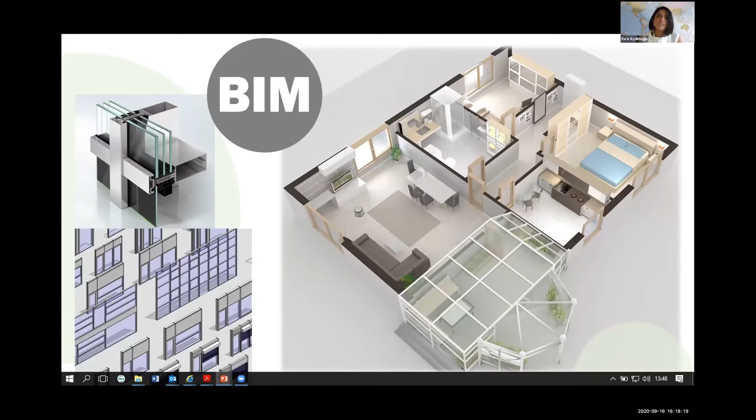You will soon find all our products as smart objects and materials in BIM libraries. In Sisecam Flat Glass, we have solutions for all needs of the projects and unlimited creativity of architects. So please do not hesitate to ask any question to us either in Q&A or through our email account.

Thank you. Thank you, Esra. This was wonderful as always. There's so much information and really relevant.

We have an important announcement to make. May I pass it on to Matali to do the honors?

Thank you, Indrajit. Thank you, Esra, for that really wonderful presentation. It's really set the tone for what's to follow. We're looking forward to a very interesting discussion.

But before that, I just want to take a minute to introduce you to something we're doing at Architect Interiors this year. This is a very exciting new project that we've announced just a short while ago, and I thought this is the perfect opportunity to talk about it. So as most of you are aware, for the past 9 years we've been having the iGen, and it's got a fabulous response. Every year we get to introduce 50 emerging, up-and-coming, budding architects and interior designers. And this year we're taking it one notch further. We want to bring the people in. We don't want to be the only ones to have a say. So we're introducing a People's Choice Award for the iGens we've chosen this year.

And to tell you a little more about it, we've got a short video that we'd like to play. We want to invite votes and get as much audience participation as we can. So Rohan, if we can have the video, please.

So we design and build things like intelligent totem poles that we can plant around the city. Here are two examples we've done in Hong Kong, which monitor the environment, count the traffic, count the people flow, and see the patterns of use of the space around. This data is then shared with the regional architecture, the neighboring buildings around, so they can really respond to the needs of the people out in the public space.

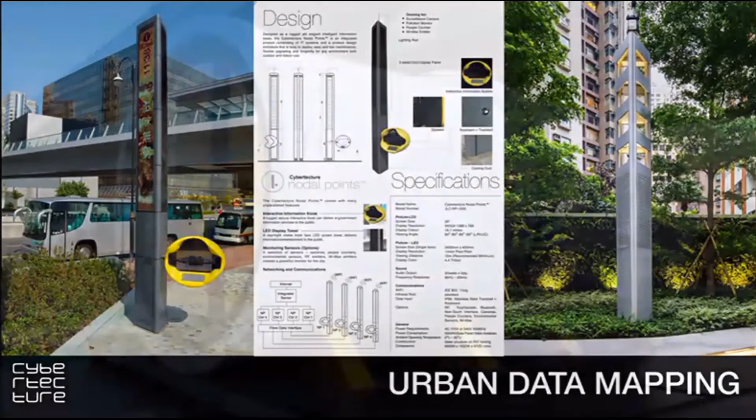We really think that parametric architecture isn't just about form making. It's not just about creating interesting, intelligent forms, though that's part of it. There's a parametric life behind the architecture that affects the people living inside it in a way that is much more intelligent and more empowering than in the 20th century. This is, I think, the really exciting part about parametric architecture for us.

James, very interesting, I think you really brought technology and lives of people together. What gave you this idea? I remember the one you mentioned about the glass talking and giving you information, this was done many years back in your work. What propelled you to go in this direction?

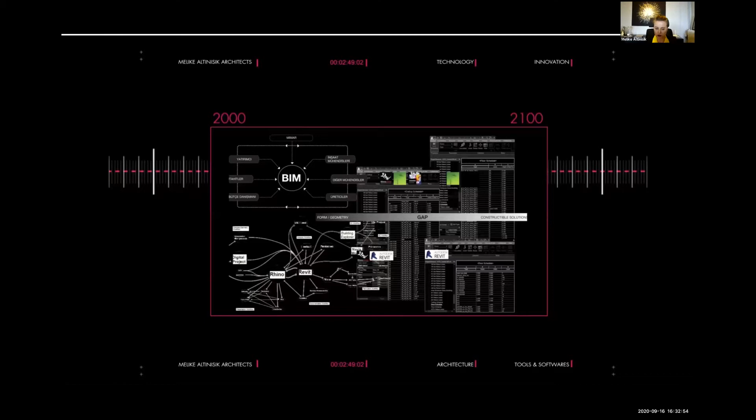Advanced technology implementations define today the way we think and design, in the last decades especially. We need to live in smart cities, and designing smart cities requires smart design and smart construction methodologies. Most of the time, we take already existing computational design and fabrication techniques from other industries, such as aircraft design or the car industry. By reusing those technologies, we apply those systems into architecture in our studios. CNC, laser cutting, 3D printing, robotic fabrication are just some examples of those tools which we use in our daily work.

Once you discover these unseen logics behind these systems, you can start working on multidisciplinary platforms. Each project has its own challenging problems, and they require unique smart solutions. In my studio, related to this subject, our design approach also aims to apply those computational design systems into architecture, and we work on varying scales of projects.

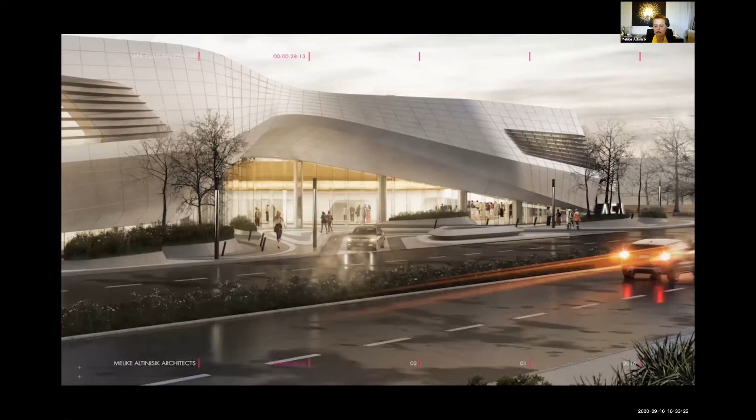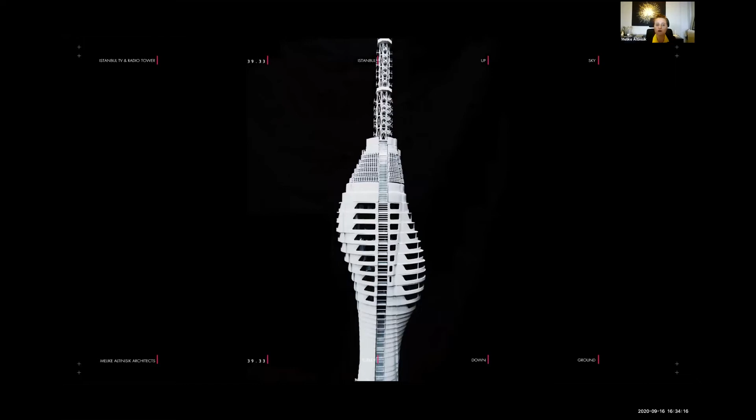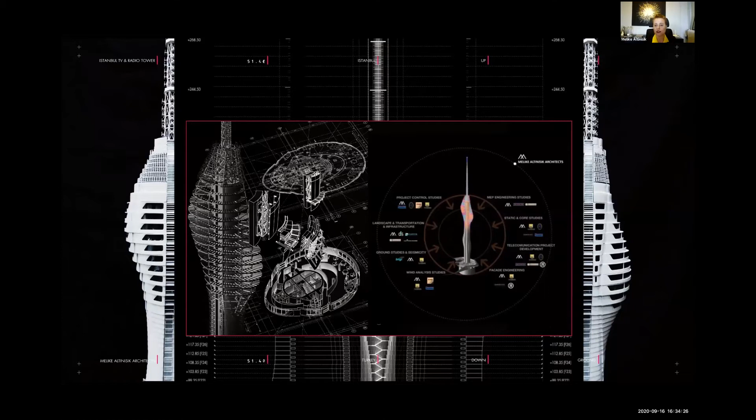The first one is the Istanbul TV and Radio Tower project, located on the Asian side of Istanbul. It is a 369-meter tall TV and radio tower project - a telecommunication tower, but it has public functions also inside. To shape this building, we used all the wind data located around this area, and we gave the shape of the tower using all this data. That's why the facade looking towards the Asian side of Istanbul is different than the facade looking towards the European side of Istanbul. All these parametric tools actually enabled us to create a really important dialogue between parametric design and smart construction on site.

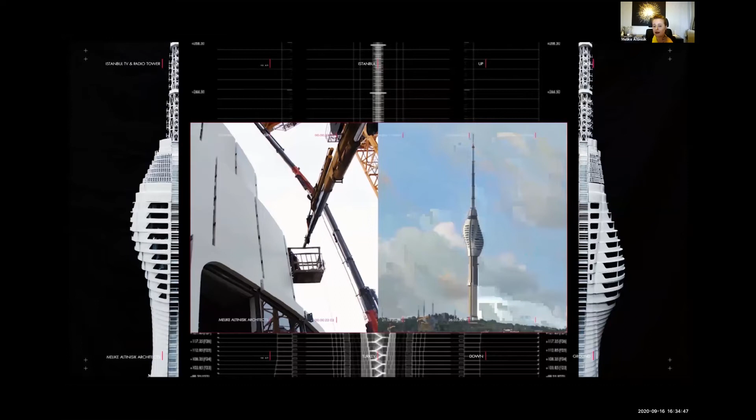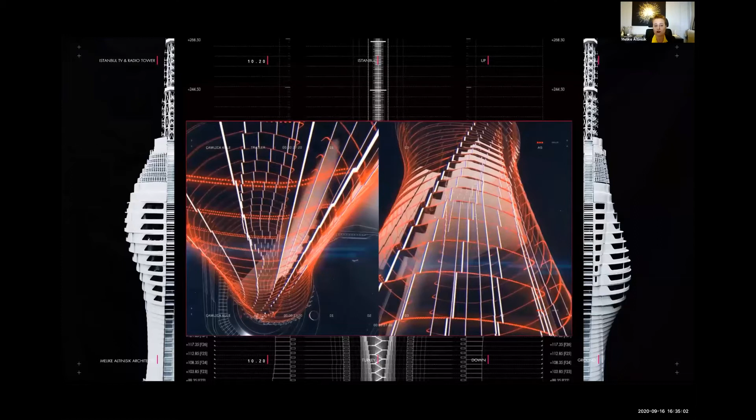We used totally advanced engineering techniques, building up the building from a bottom-up approach. We built 4 or 5 level high blocks on the ground and lifted them up 200 meters above, around the core of the building. There are more than 2,500 different facade panels, each curved, using glass reinforced concrete, and this already required a specific kind of digital fabrication, and mock-up making was also very important for this tower.

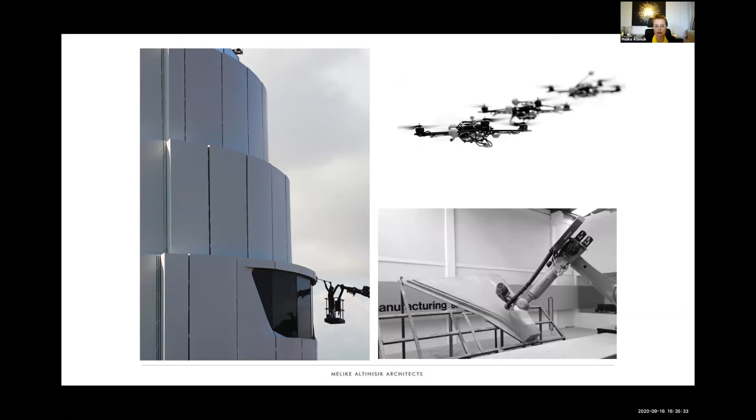We hope to use drones for facade maintenance in the near future for this tower. Since we have been using all these parametric tools, they will also give us this advantage for maintenance after the opening of the tower. Very soon, hopefully next month, the public will be able to come and watch the panorama of Istanbul, almost 400 meters above sea level. We hope to see you also here in Istanbul after these COVID-19 days.

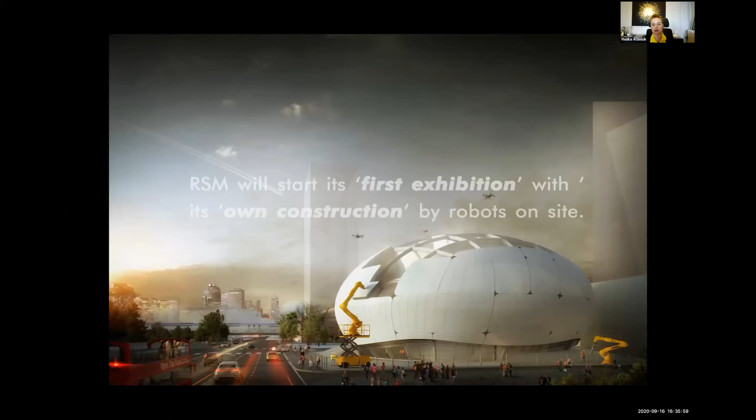The next project I would like to shortly mention is this Robot Science Museum project, located in South Korea. For such a smart city, we wanted to really propose a smart design and construction methodology.

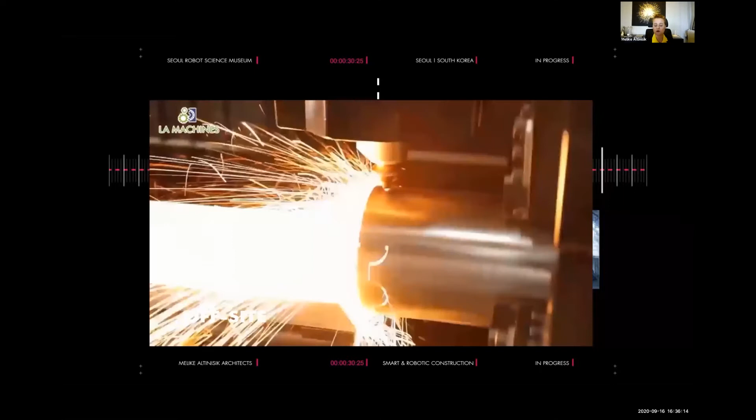So this building will also start its first exhibition with its own construction. And here one of the most important subjects is this: currently, in our era, we are using all these computational design tools. They are communicating with offsite manufacturing.

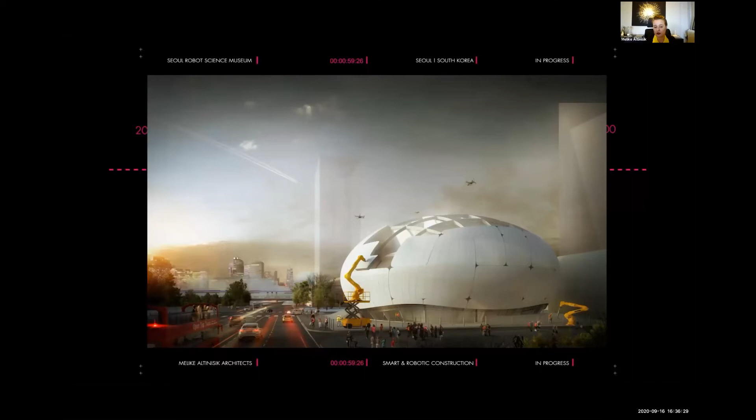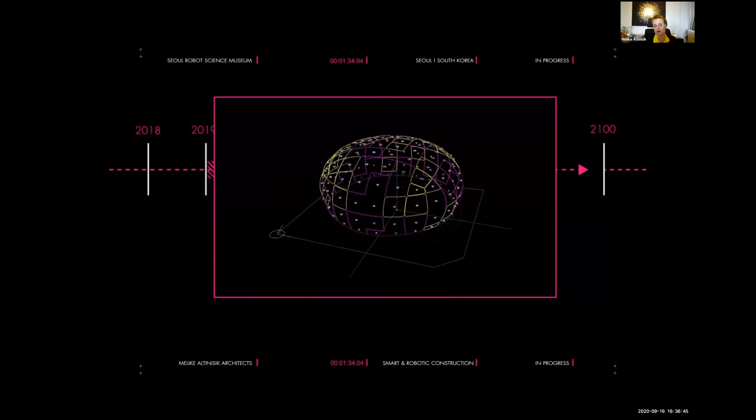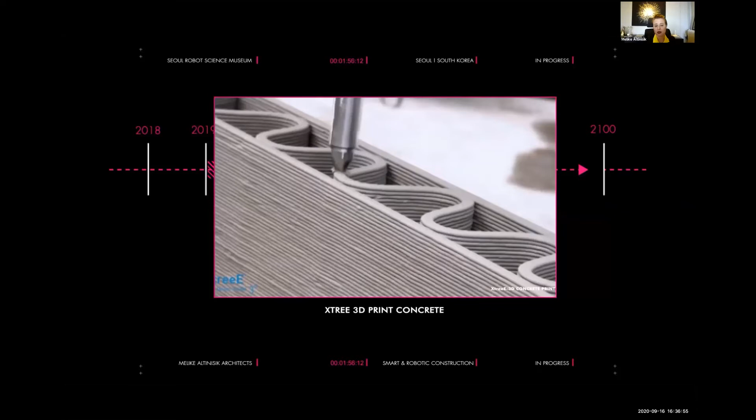But the most important subject for the near future will be doing this on-site. And to be able to do this, we have to really create very smart design tools to control every single element during the design process, to communicate on site with the building builders, and these builders will sometimes be robotic construction methodology, sometimes again like human beings.

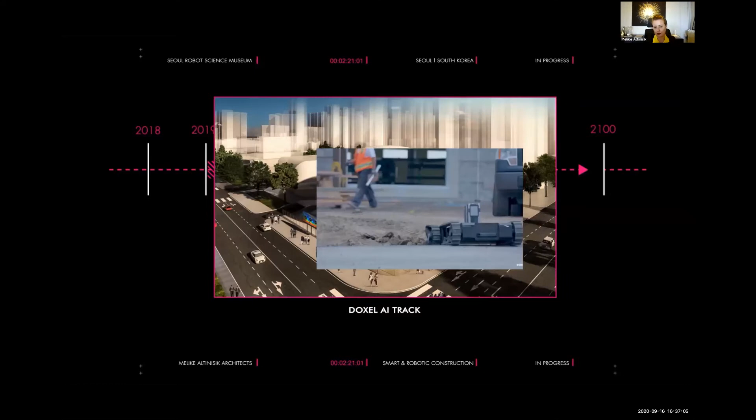And here we will be able to use all these types of very smart construction methodologies for this project on site. For all these things, parametric architecture is a key tool, but above it, I believe it's all related to building information modeling. All these things are united together through technology, and this type of museum will become kind of a monitoring and research center.

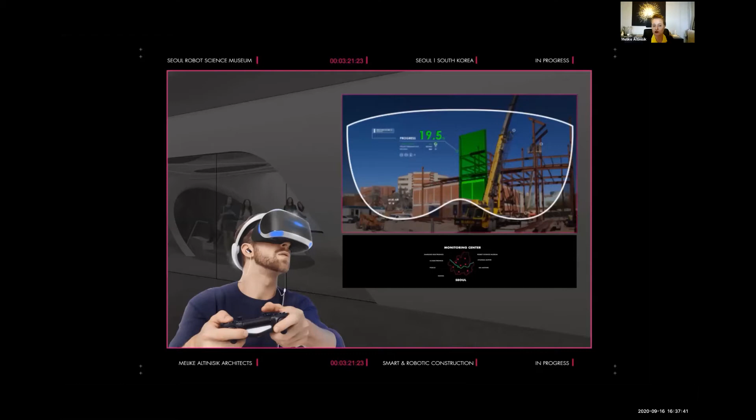And again, as James was saying, this is not only during the design and architecture part - also the living part, the social life inside these buildings, will be able to all connect to each other through social commons. And also there will be, in service, all these robotic services active for this project.

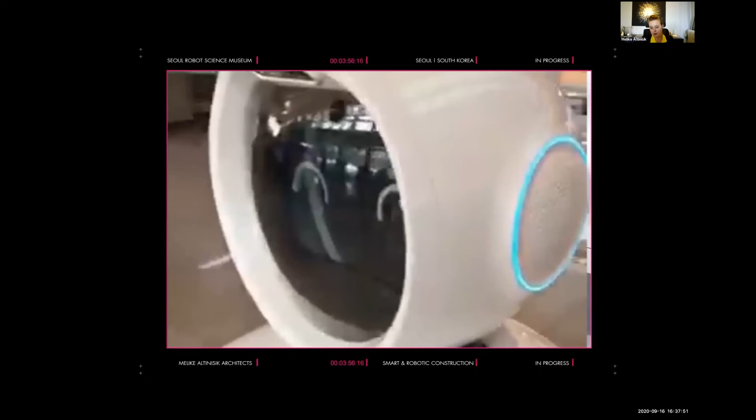So in general, I have to also say that soon, in the near future, all these developments between architecture and technology will enable us to become system builders for architecture. So not only are the tools getting smarter, we are getting smarter and we get connected together.

Thank you very much. Wonderful, wonderful, Melike. My goodness, compliments to you. What, wonderful, magnificent, large - I mean, I will run out of words. Am I audible? Can everybody hear me? Awesome. Now, Melike, that was tremendous. I mean, needless to say, for a moment I felt speechless looking at your projects and the kind of magnitude and thinking that would have gone into these.

Let me bring Sushant very quickly and hear from our friends from India as to what is the leap that we have taken forward in parametric architecture. But let me tell you, Sushant has been really imparting great education, not only in India, but world over. Over to you, Sushant.

Yeah, so I'll just try to go through various kinds of projects that we are doing. For me, computational design is a term which I more commonly use than parametric design. Parametric is a more popular word, more commonly used and understood by a lot of people. But in essence, it's actually computational design, where we are using computation and computing a lot of information and data - data being a word we heard in the previous presentations as well, because most of us are actually doing nothing but manipulating data to create better spaces and solve much more complex problems.

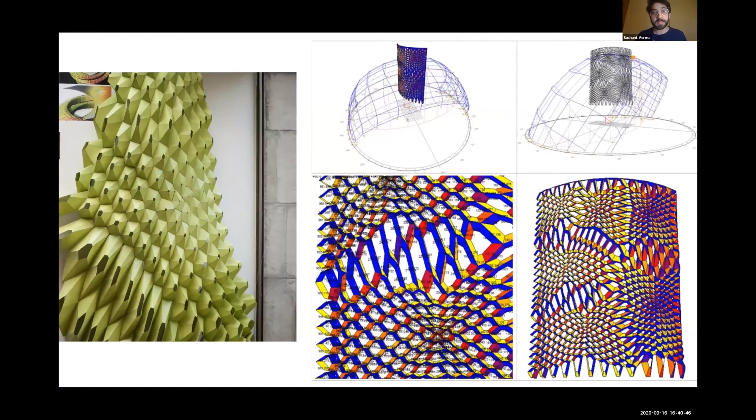These are a few glimpses of some installations. What I also want to throw some light on is the technical aspect which goes behind these forms, because as James also rightly pointed out, it is not only about the form or the geometries - that's obviously one major part of it, but more than that, there's a lot of data and information that we are working with. This, for example, is a prototype of a facade, and on the right-hand side, what you see is the radiation analysis of that facade with specific numbers and data information embedded into the model.

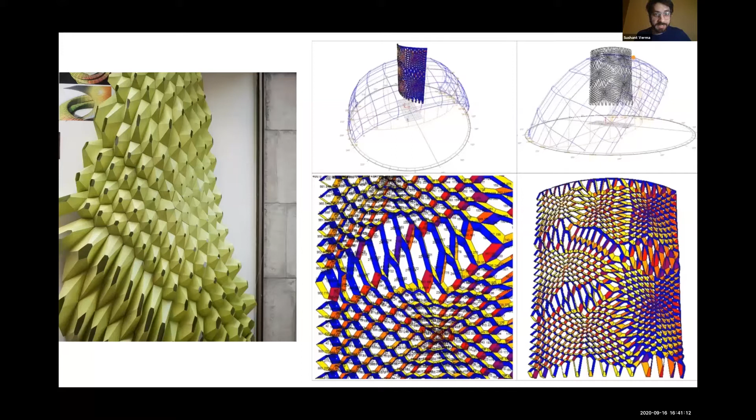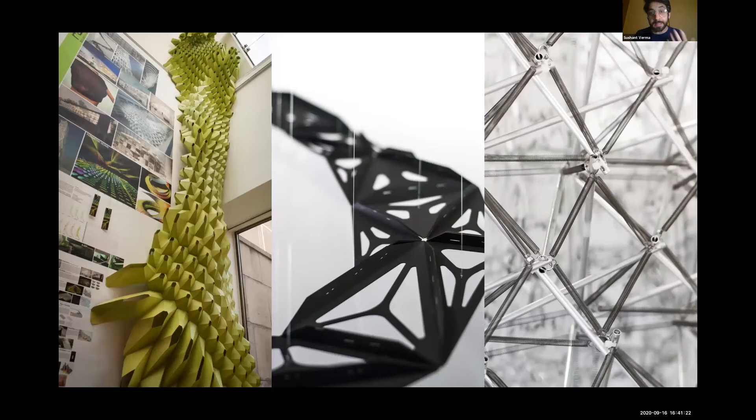Over here you would see the structural studies, the CFD analysis, which we typically carry out for some of the installations and projects. Going slightly on a larger scale, this is an interior space, an experience center, where the lights that you see over here is actually CNC cut marble, white marble, which we typically use for flooring. So of course, we try to bring in innovation in various aspects.

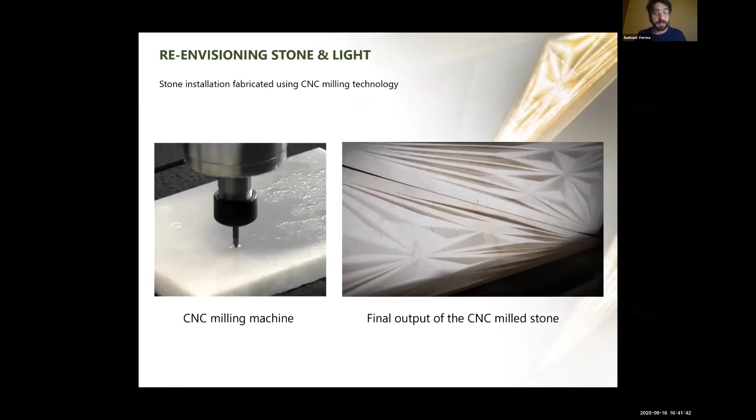In this particular aspect, the program was seeking innovation in terms of materiality and lighting, which we made possible using computational design. And of course, we used the recursive approach to design the mathematical fractals, which form the entire shell of this inner skin. The same thing goes on to a variety of projects and typologies as well.

These are a few restaurants which we've done. This is a lighting installation, a project we worked on with a lighting designer. This was a collaboration with a fashion designer. I'm trying to show you a variety of scales and typologies which allows us to work within the realm of computational design. These are office spaces and experience centers built across different cities in India, which have certain features of parametric design.

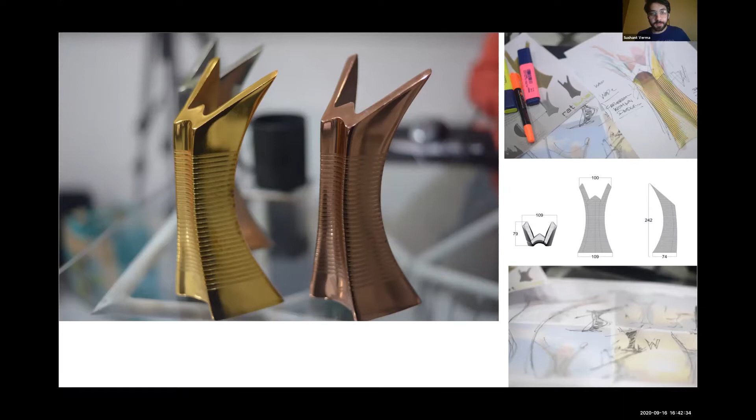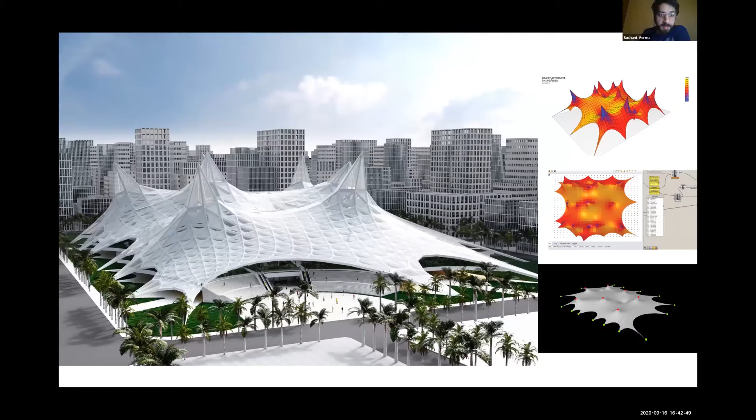At a smaller scale, at a product scale, we've also designed trophies and awards, which also have a parametric approach to it. This is a shopping center in Tokyo, a collaboration with Japanese architects, which was more of a form finding approach where we used a physics engine and simulated environmental aspects to optimize a skin, like a large scale complex or a small scale city, I would say.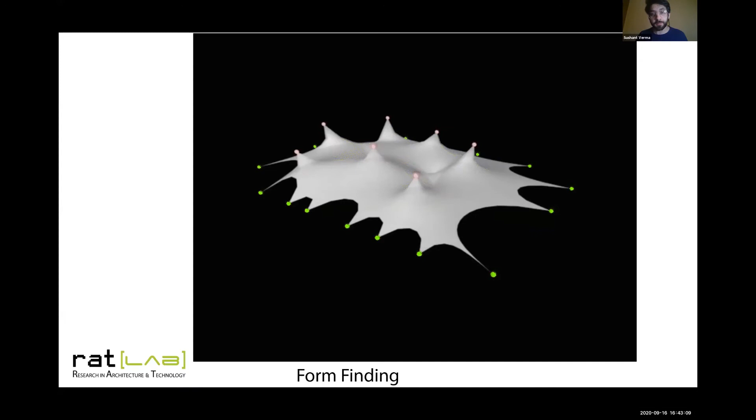Just a little video to show the kind of simulation that was done, which is a fairly simple one. We typically teach that to our students, where you have to do form finding and see how the structure is resolved as well.

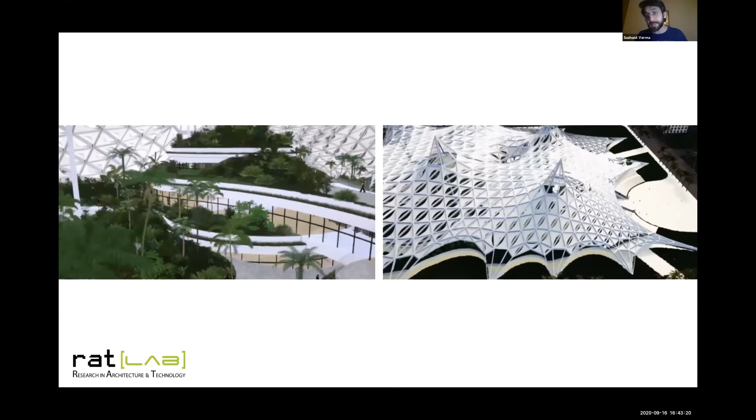These are some aerial views of the same, from the outside and the inside. All of these panels are actually adapting to the climatic aspect of Tokyo, which we analyzed to define the sizing of each and every element.

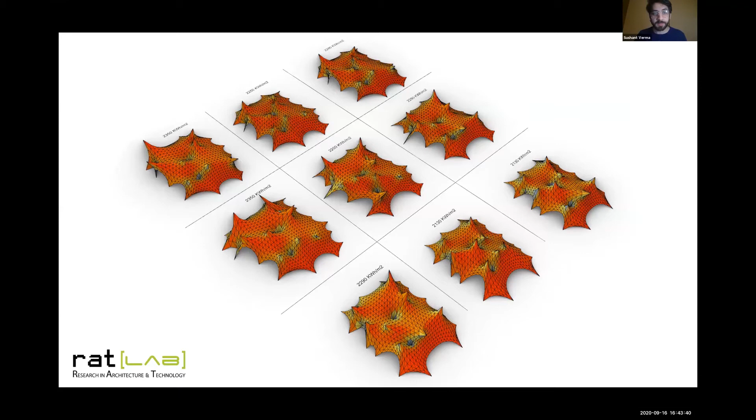Parametrically, of course, it allows you to create a multitude of geometries, but you need to be able to control the information and data. Here we're using the environmental aspect to rationalize the form, which you can see here. This is a facade project, which was more of a high tech and low tech approach.

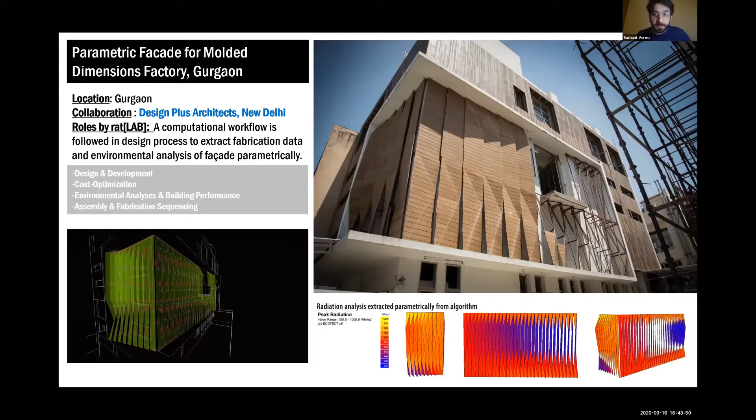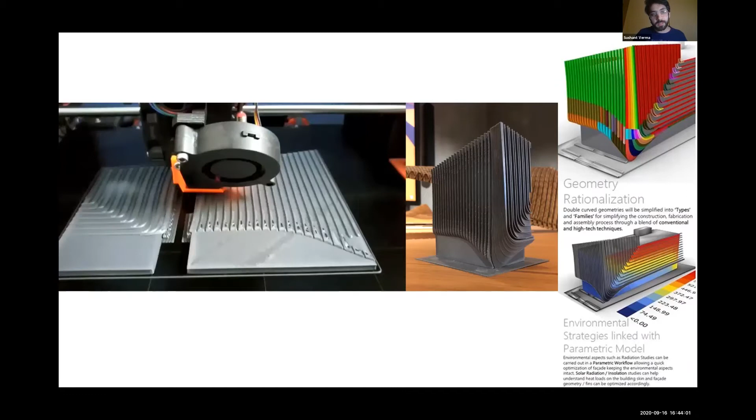This is another facade in Hyderabad, which we 3D printed at a small scale to make sure that a facade engineer in India who is not adept with high tech technologies is able to understand. So we have to simplify the complexity of any geometry and rationalize that based on any project.

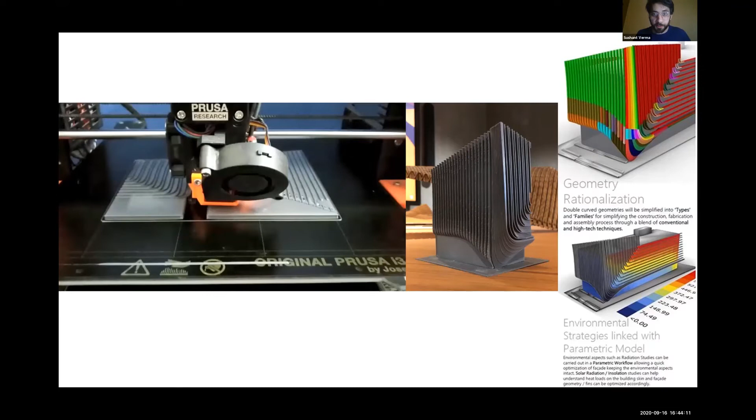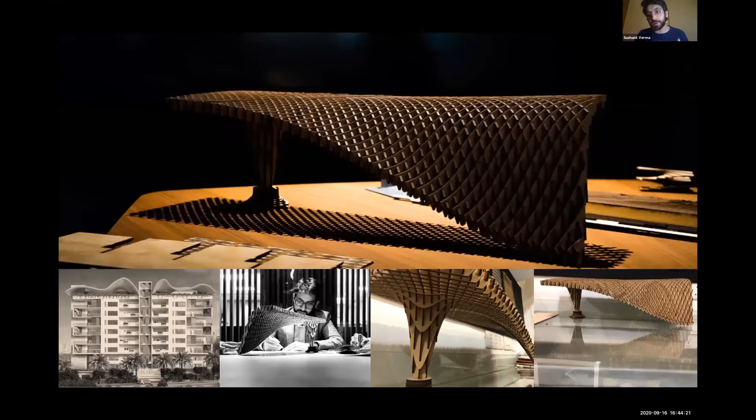These are a few more facade projects, ongoing ones, and a few canopy structures, which we again prototype at smaller scales to understand the fabrication. So it's a back and forth process. It's not that we are only working with computers to give us a form or a data or information.

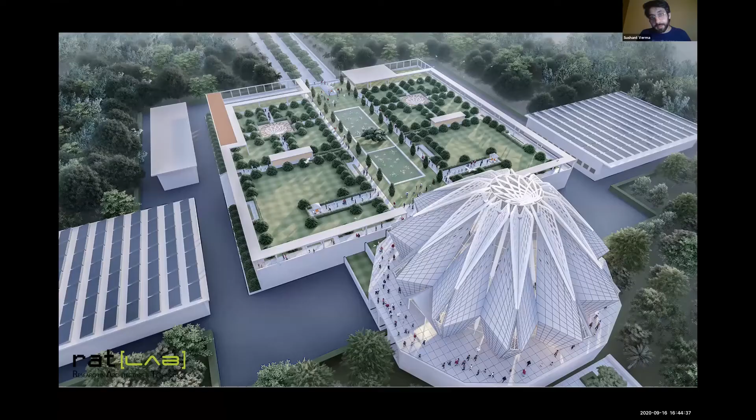This is one of the upcoming projects in South India. It's a temple project where we've used certain principles of Vastu and numerology to incorporate sacred geometries and forms, where we used an 11-sided hendecagon and created a variety of forms.

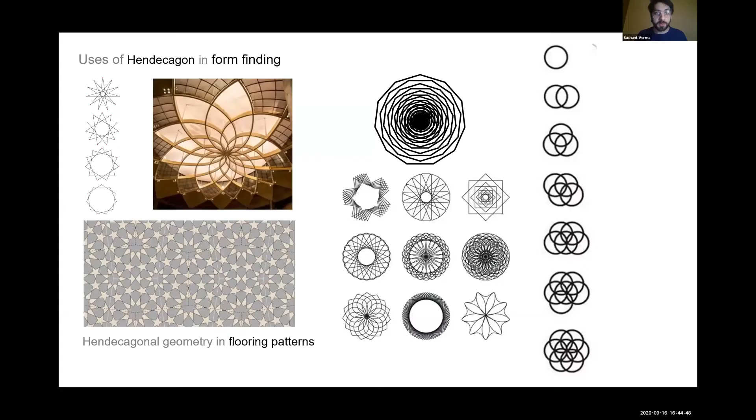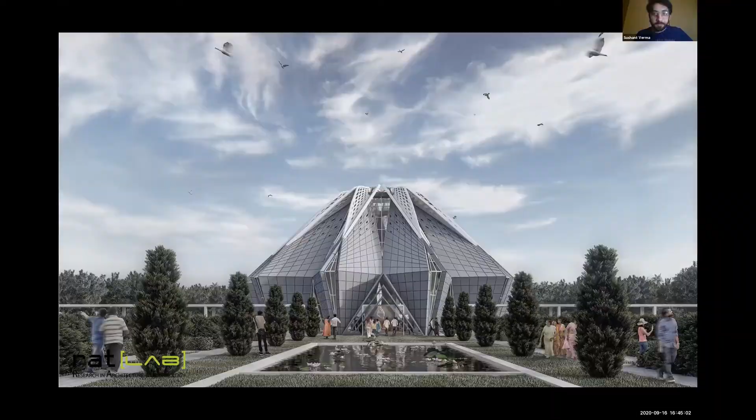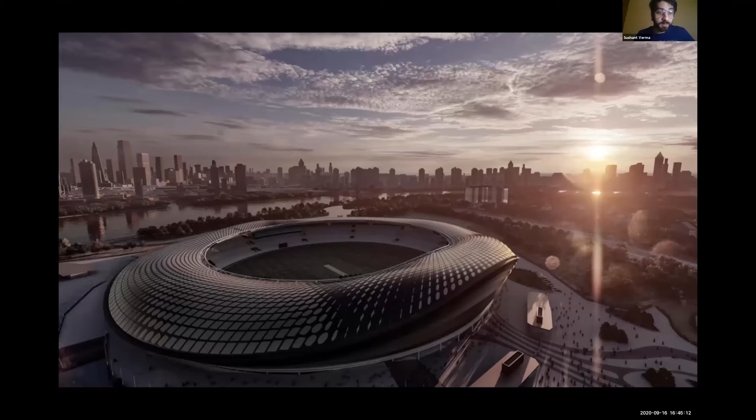An upcoming project in Australia, which we're working on - it's a cricket stadium. We're quite excited for this one, where it's more of a very simple form, but the whole idea was that we actually started with developing a tool to design a stadium.

So we not only work on the actual architecture or design, but on the idea of tools as well. This one started and initiated with a tool development we were doing for a sports infrastructural company, which ended up into this project where we are using the tool to evaluate the C value, the horizontal angles, the vertical angles, and optimize a seating layout, creating a design through an algorithmic process. So there are a few more snippets of the stadium.

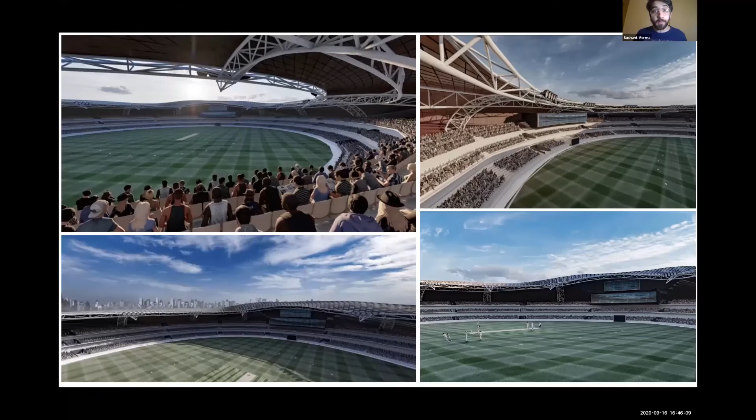For us, computational design is basically a tool that allows us to work on a variety of scales and typologies. And that's pretty much what our articulation of the tool as well is.

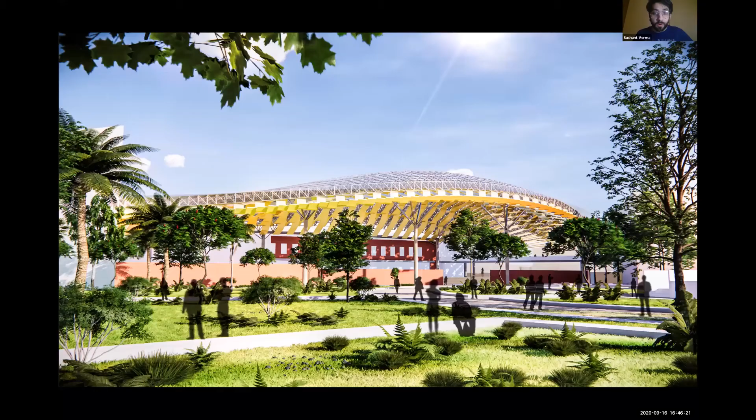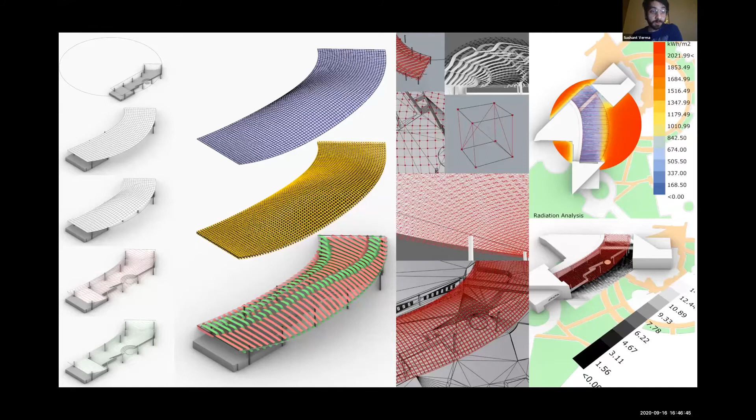These are a few interior spaces, a project in Mumbai. This is a technological campus, an ongoing project in New Delhi, where we have this weaving kind of structure. It's a triple layered skin, which protects you from the harsh sun, provides a nice microclimate inside, and is able to rationalize the geometry so it can be built and fabricated at low cost, using low tech technologies available for construction in Delhi.

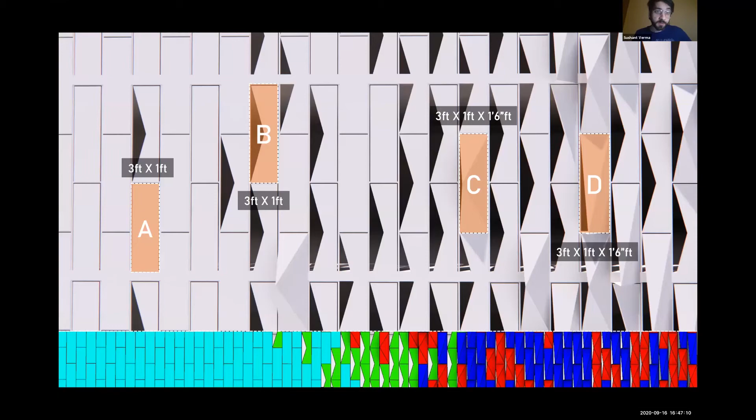This is another religious project, a competition in Dubai for a mosque where you have these columns which actually start to appear as arches when you see them in perspective, which was pretty much the whole concept, articulated through some complex jalis and roof structures and formations.

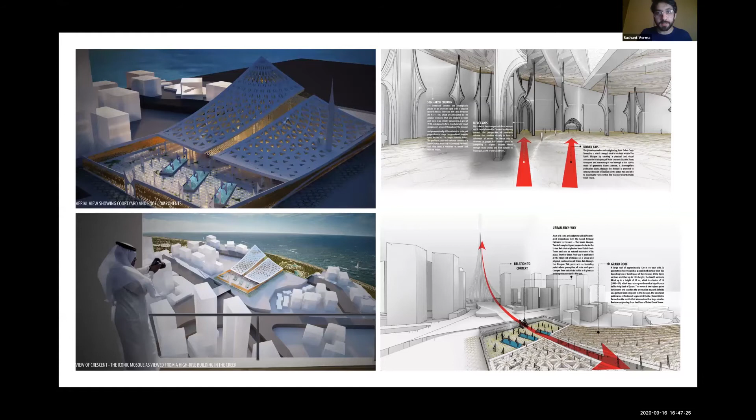So that's pretty much what our journey of computational design has been, going from something as small as a product or a trophy, to a fabric or a dress, to an office space, to a large stadium. We believe that computational design really empowers architects, especially today, where we have the access and means to learn technologies.

Awesome, I mean, what do I say? Right from extreme, from small things like a trophy to such a large project, especially the one that you're doing in Australia.

Tell me, Sushant, what are the kinds of learning curves you see on the client side, because it's so much technology, and especially in religious places, you need to marry the Vastu and the numerology. So how, on ground, do you feel it is—really challenging, or is it easy?

I think it's very challenging because there is very little awareness about the subject. That is the most challenging aspect, not just outside the fraternity, but within the fraternity as well. Most of the time we are actually collaborating with other designers, so there is obviously a challenge because there are a lot of expectations from technology.

People actually expect technology to solve your problems and give you a solution. On the flip side, technology does none of these things—that's all that humans have to do themselves. So we actually have to become smarter and adapt to new technologies, and be able to use them smartly.

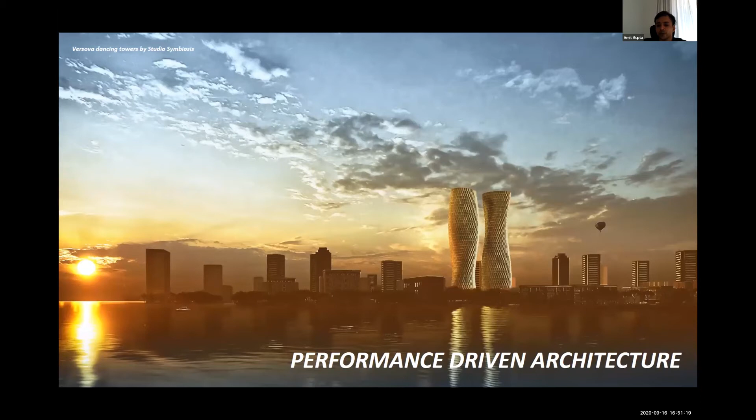For the purpose of this talk, I've split this into 4 different topics. Speaking about performative aesthetics, there's usually a mindset that something sustainable is not beautiful. But that's not true—when worked with nicely, you can marry the two. You can make sustainable architecture also very beautiful.

So the first project is a high-rise tower we are doing in Bombay, in Versova. Here the design driver which we're looking at is a view - as simple as capturing a view and cutting the solar heat gain of the rest of the building. We are very fortunate to have this site with marvelous views of the waterfront.

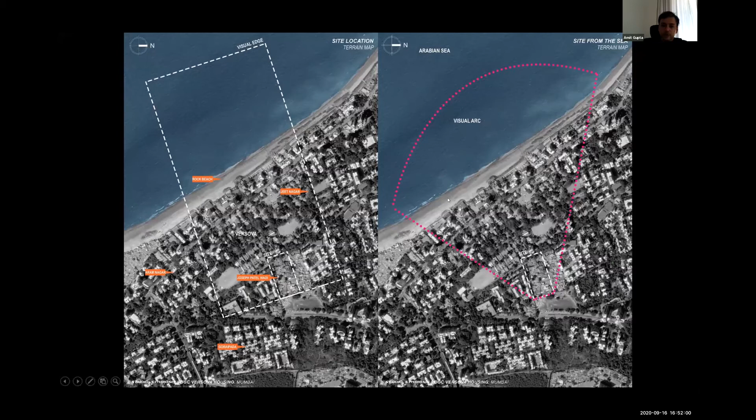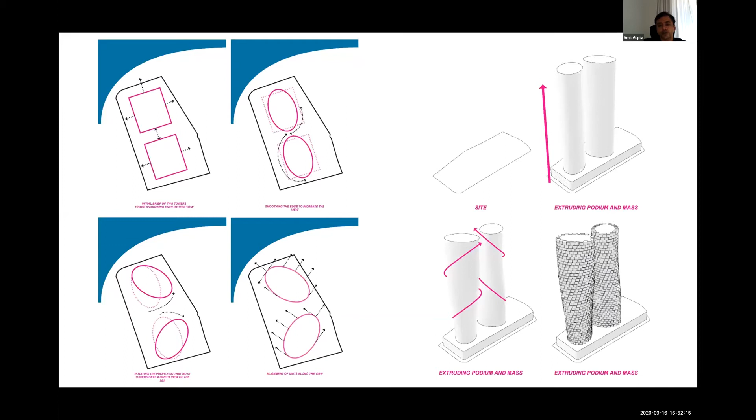The tricky thing for us was to marry the client brief, because construction cost, construction time frame, delivery time frame had to be looked into. And for us, the design driver which we set was that every apartment, every room has a view to the waterfront. So through iterative design, we did a lot of optimization studies to see how the apartments are changing in terms of verticality, and also that the tower in front is not shadowing the tower in the back.

So the thing is, to set up a very difficult design driver with two towers shadowing each other, we are still able to make sure that every apartment, every room gets a view of the waterfront - doing a lot of iterations and running through scripts to get an optimized design. This is from the waterfront looking back, to show that there's no shadowing effect happening between the two towers.

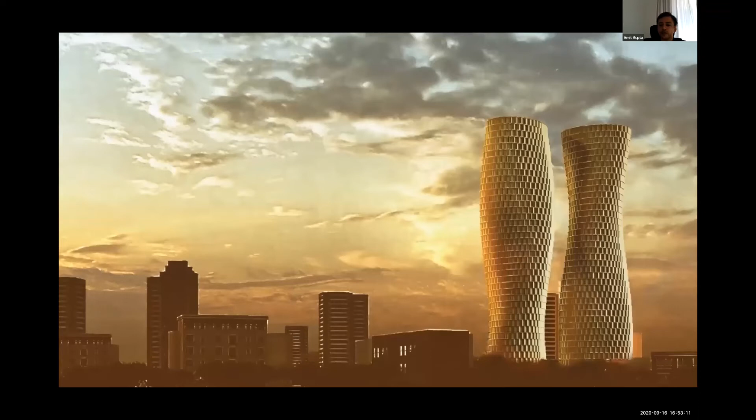Second part of this is data-driven design. Architecture for us is a combination of art and science. I think computational tools help us merge these two things together, because we can use mathematics and computational techniques and create something which is a bit more artwork.

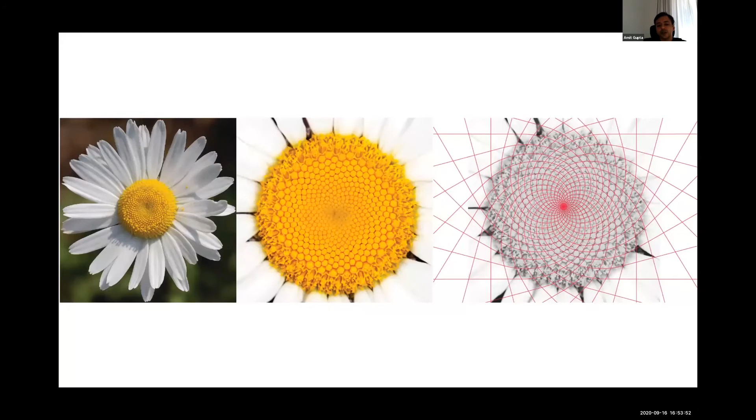This project is a perfume park and museum in Kannauj, which is also under construction. The thing which we looked at was the Fibonacci series, which is inherent to the base grid of a flower, given that the project was a perfume park and flower is where the perfume is made from. For us, it was very important to take something which is not very literal, but to create a natural system and then deploy it on the site.

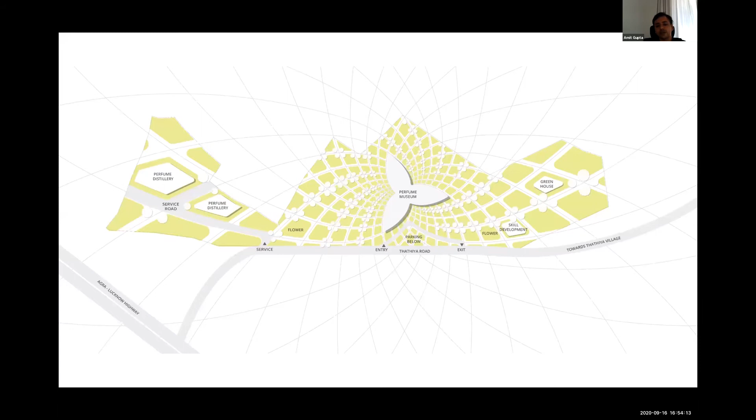Through these parametric or computational tools and techniques, we made the base grid. This was really a data-driven piece of architecture, because it was all ruled by mathematics which comes from nature. This was the overall planning. We have the central museum building sitting there, which is an interpretation of the three petals of a flower, and the same Fibonacci system is also projected on the ceiling. Parametric architecture gives us the possibility of creating unified architecture, where everything can come together as one system and all the other subsystems integrate to this.

The third one is a railway station - we're doing Gwalior railway station, which will also go into construction soon. Here the theme for us was to create something with a large span, because it's an existing station, so we cannot really come up with a new grid. The largest span we have is 32 meters.

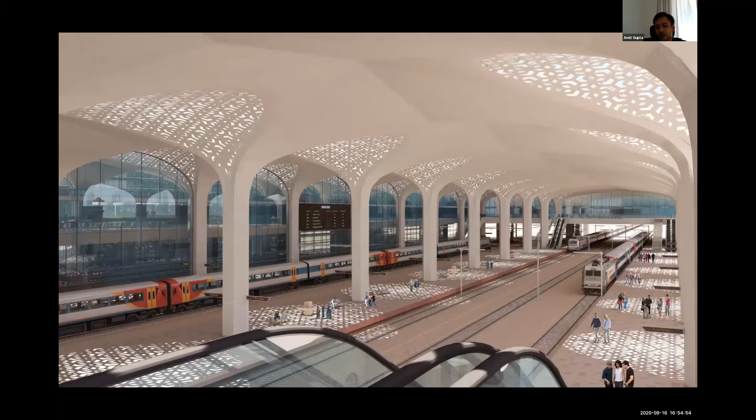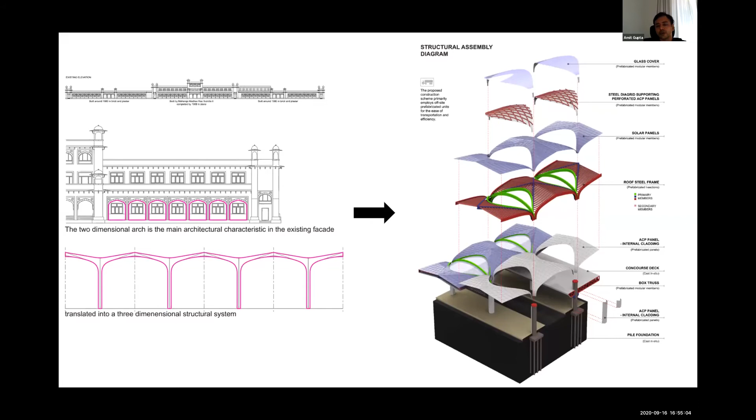Our design iteration or ideation actually started from the existing station building, which we see on the left. From this, we took the arches, transformed them into a 3D module, which became the overall formal expression of the building - so in a way, the new actually resonates the old. Parametric design is not necessarily destroying the old, but it can also be used to highlight what is already there as per the history of our country.

The beauty about this for us was that architecture, form, function, structure - everything is married in one simple component. It's a modular system which can be repeated, and it is transformed and translated in one or two places for changing the spacing because of the spanning of existing platforms.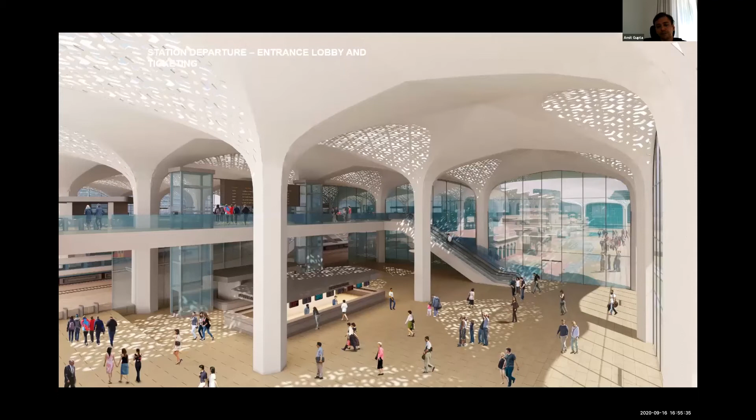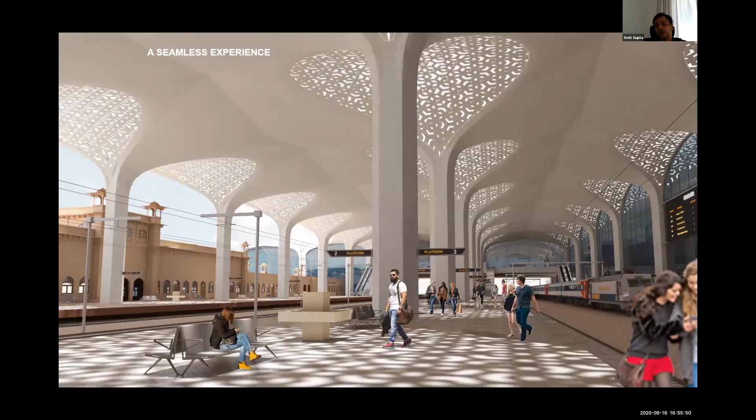Solar simulations were done because stations have very deep floor plates, so we wanted to get a lot of natural lighting in there too. Based on this, we gave a lot of punch windows and jalis on the roof to get nice shadow patterns on the floor. The shadow patterns will also animate throughout the day, and this becomes a visual interest for us.

Prototyping is one of the most critical aspects. This is a built image of a prototype we call Smart Lounger, which was done by us. Sustainability was at the core of this. Doing curve form, we actually end up losing a lot of material, but kerfing is whereby just cutting the wood, you can bend the wood.

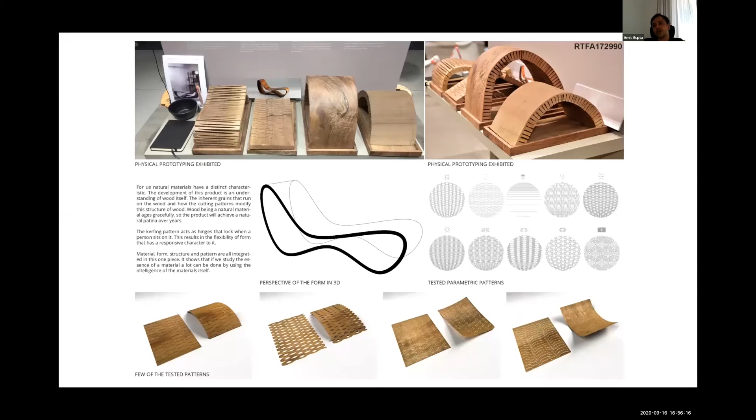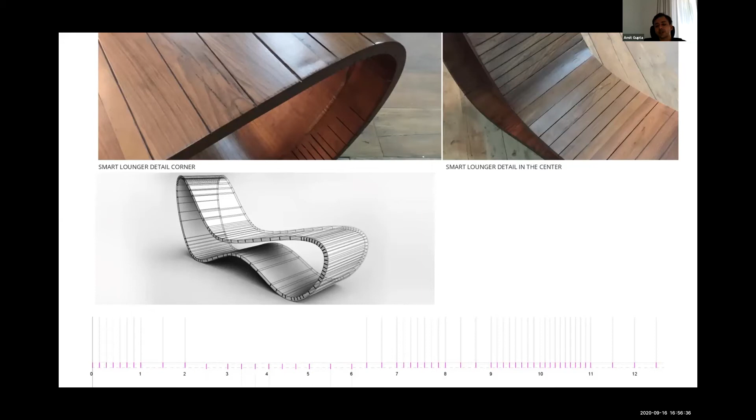The analysis for us was trying to understand how much stress analysis is on the form. What you see at the bottom of the screen is the only piece of drawing given for execution to the carpenter. In India, we have to look at both high tech and low tech, so we do a lot of stuff in the back end, which is high tech, computation, but the execution drawings are very easy to read. This is something we are trying.

Before, if time permits, I have this very short animation which actually covers these four topics. Yeah, please go ahead.

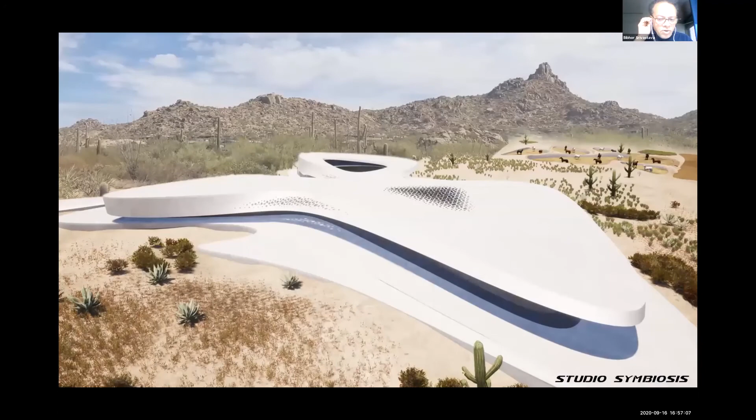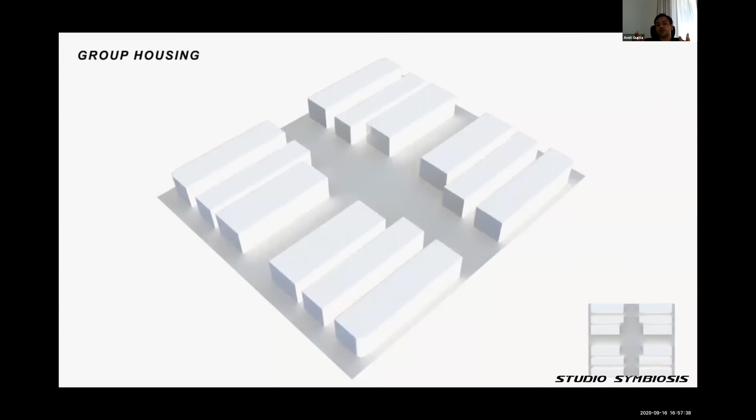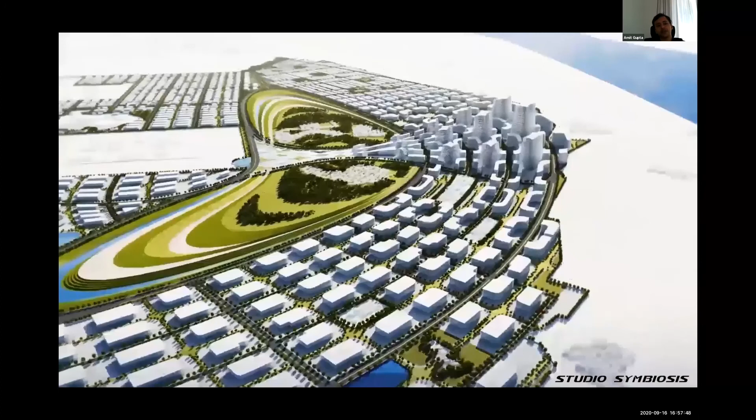Again, you can do a lot of blending systems using the systems here, which is the Allahabad master plan. So we went from row housing to group housing to towers.

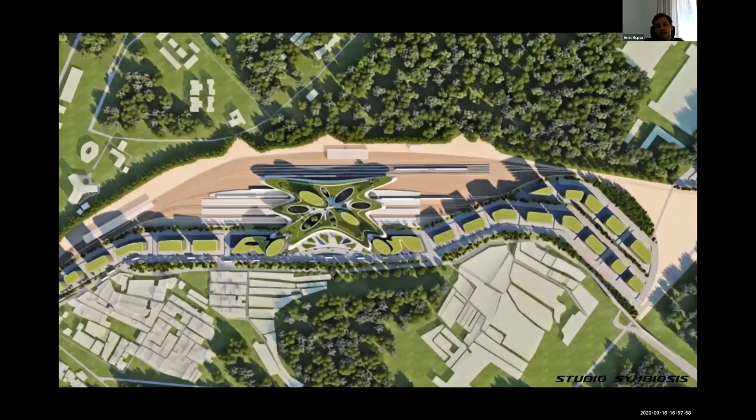Then as a part of sustainability, this is the other station we are doing, the Bangalore train station, which was a resonance of Bangalore, a smart city. So here we did a lot of flow analysis for the station building.

These are all projects which are under construction or going to go under construction soon. So using these tools and techniques, we can actually check the surface area, because in a station we need to maximize the surface area of the front of the building to ensure multiple in and out points from the building.

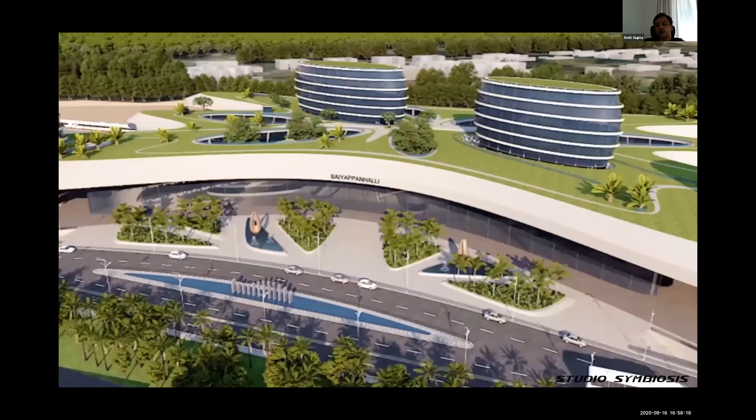And yeah, so again, this is the same as what I showed you earlier, the Gwalior station. And last is the prototyping bit. It's very important that digital and physical speak to each other. It's a feedback loop which you have to create, so you cannot just have digital without the physical. So prototyping becomes a very important part of this architecture of parametric or computational techniques.

No, Amit, thanks. I think looking at the scope of work, in terms of what I'll now start calling computational design rather than parametric architecture, this is fabulous work you are doing in the country. I think you've really covered the entire country, and the work has gone across from commercial to large residential, the entire bit that we see here.

There are a lot of people asking a common question, if I can put forward that question to the panelists: what's the future of parametric architecture design in India, and how can it be scaled up?

Okay, now that's a very interesting question, and I think two gentlemen are from India, and we're very keen to take this question. We will put it together for Sushant and Amit to answer that. Amit just went through the presentations, so I'll ask Sushant to answer this audience question.

Before, sorry, my system crashed, I had to reload. No, it's all right, it's perfectly fine, Amit. Actually, there was some very nice line you said, and I think again it's all technology, but I could barely hear it, and that's why I wanted to hear it again.

But nonetheless, on the other side, Sushant, Amit, if you could have heard the question, which is like unanimously coming from the audience, is about the scope of PA. I love the word PA, there's a new terminology which has just evolved. PA's scope in India - so I've just asked Sushant to share his thoughts, and then I'll come back to you.